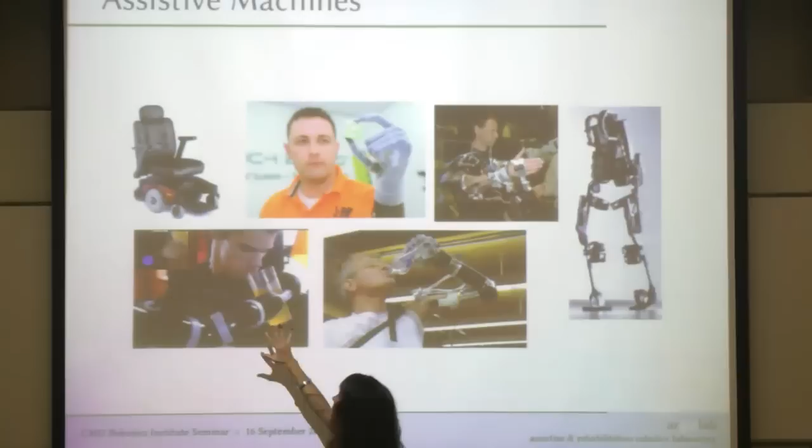If we now consider those more limited control interfaces that I was talking about that are used to drive powered wheelchairs, those just are not used to operate these kind of arms. It's too taxing to try to operate 6 dimensions individually. And so what we now see as a result of this is a paradox where the machines that likely would benefit a certain patient population the most are inaccessible to that patient population precisely because of their motor impairment.

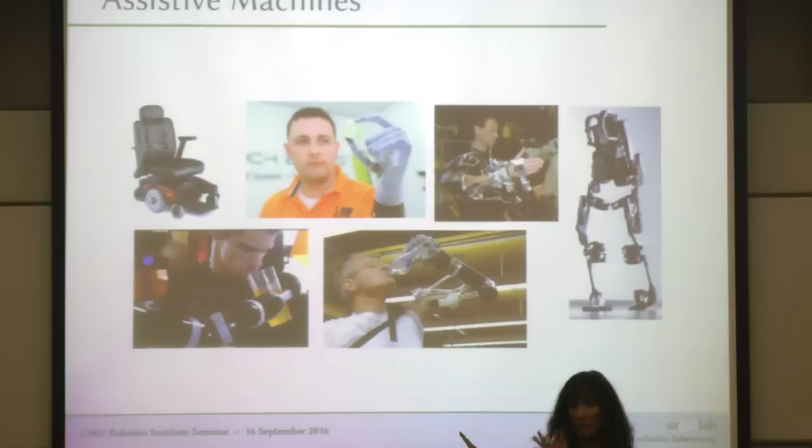And this is an opportunity for robotics autonomy. So if we can turn these assistive machines into autonomous robots that share control with the human user, so the human user is always still in the loop. We know that the humans want to be in the loop. They don't want a full autonomy solution.

But if we make these systems that can control themselves, and share control with the human, then we can hopefully offload some of the control burden from them, perhaps even make these assistive machines accessible to people whom they are not currently accessible to. So how do we turn an assistive machine into a robot? Oh, sorry. So just to recap, these control challenges that I mentioned on the previous slide.

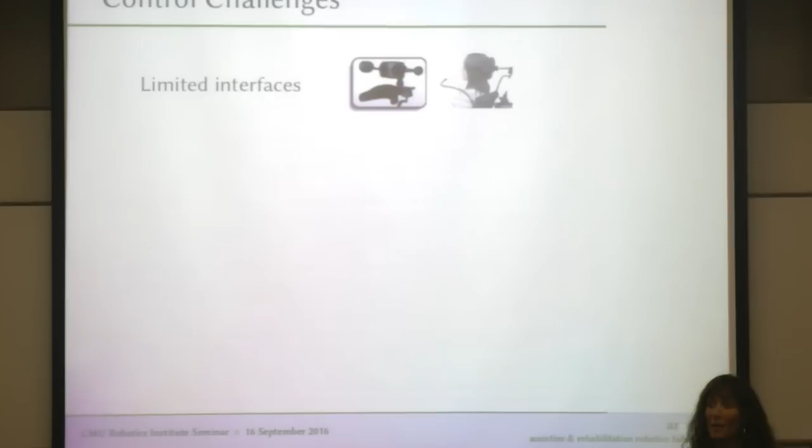So first, we have these limited interfaces that I mentioned. So right here is the sip and puff that I talked about. There's also head array-based interfaces, which are basically switches that are in the headrest. And so you tap back to go forward, you tap right and left to go left and right. If you need to go backwards, you maybe do a double tap back. You can sort of cheat if it's positioned properly and maybe activate the back and side panel at the same time, and then you could get a 2D control signal, but not necessarily always.

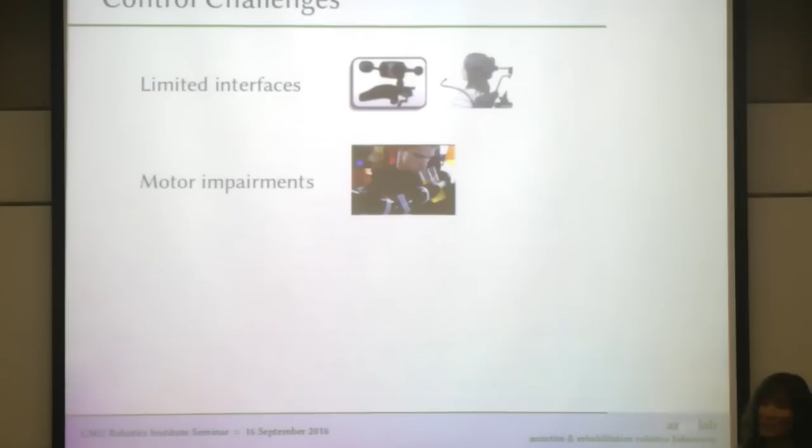Then we have the motor impairments of the user. So regardless of the interface that they're using, the motor impairments of the user are probably masking their true motor intent, perhaps filtering it as well. We have machine complexity. So we've got this paradox I mentioned earlier where likely the more motor impaired a person is, the more complex the assistance they require is, which means that the machine that will provide that assistance is more complex, which means it's more complex to control. And yet, it's harder for you to issue control signals of higher complexity because of your motor impairment.

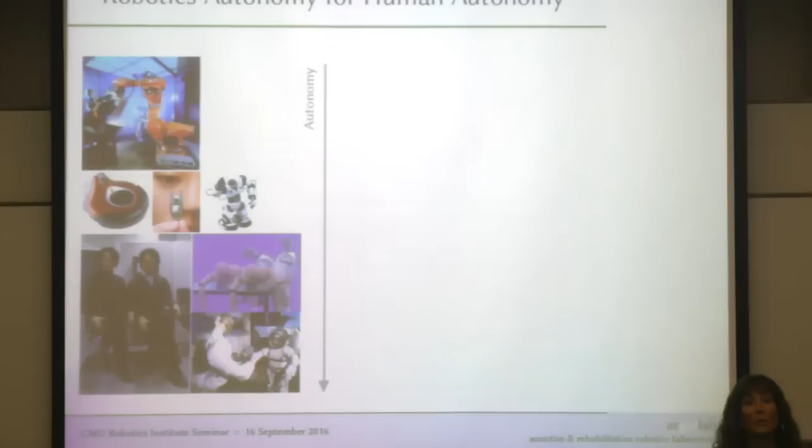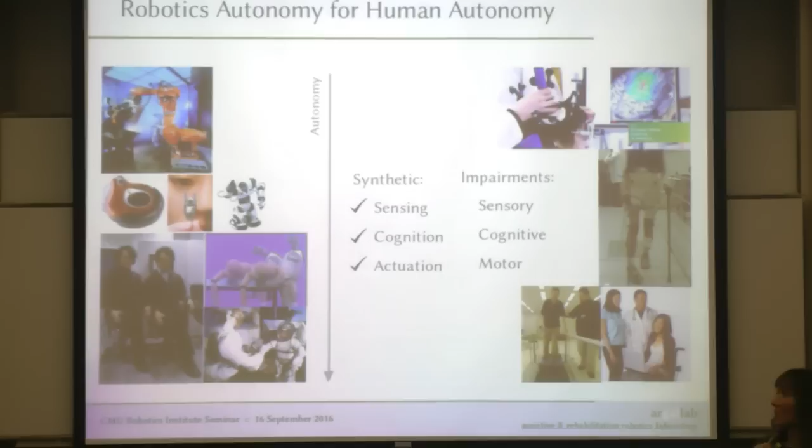So what we'd really like to do is leverage all these advances that we've made in robot autonomy as we've gone from robots in the factory to robots being in people's homes and future domains where we really want robots working side by side with humans. In order to do this, we've had to come up with synthetic ways to accomplish sensing, cognition, and also actuation. And what we would like to do is leverage these synthetic approaches to address impairments in the sensory, cognitive, and motor systems of humans.

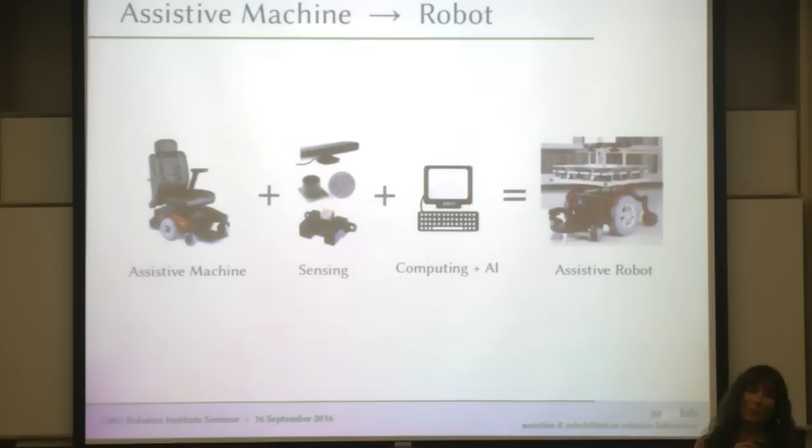All right, so how do we turn an assistive machine into a robot? It's going to be no big surprise to people in this room. We first need to add sensing in order to sense the external world. We have to add on computing and AI in order to reason about that sensory information and also the control signals that are coming from the human. And then we've turned our assistive machine into an assistive robot.

Now, all of these control challenges that I mentioned before that are challenges when the human is just trying to teleoperate the machine are also challenges for our autonomy to try to interface with the system. We also have one additional challenge as well, which is that our humans have non-static abilities. So we know that our humans are going to be changing over time, either because they are in successful rehabilitation and they're gaining function, which is of course what we hope. They might have a degenerative disease and they might be losing function, which is what we don't hope for, but it's the reality of the domain we work in.

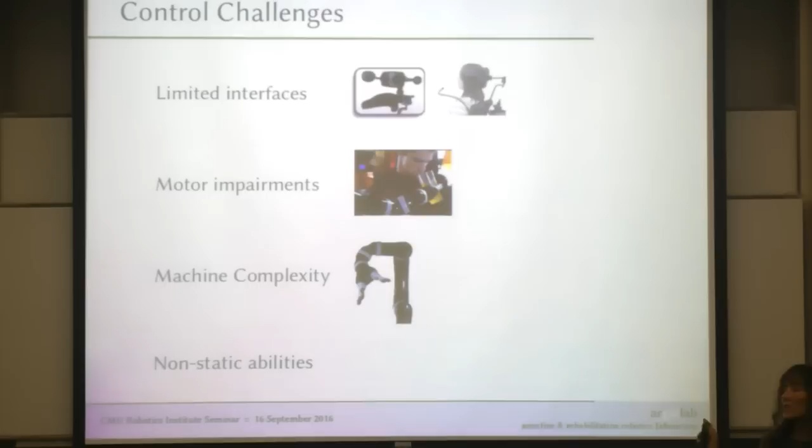They also are probably likely changing in the amount of assistance that they'd like day to day or even throughout a day based on things like fatigue or pain. And then also every human just changes over time in how they interact with automated systems in general. And so what we want to do is be actually responsive to that. I think actually that's going to be a linchpin in this kind of technology being adopted out in larger society, is being responsive to the fact that the amount of assistance that people want is going to be changing over time.

So these are the robot platforms that we're working on in my lab. We started out with this wheelchair platform that's actually just built on the base of a powered wheelchair. So this is a development platform. You'll notice that it doesn't have a seat. That came along last summer when we got a second platform, and my postdoc ported our sensory and software system onto it. And this is what we can now use to do subject studies with motor impaired patients who can't, for example, walk behind the robot while they're teleoperating it.

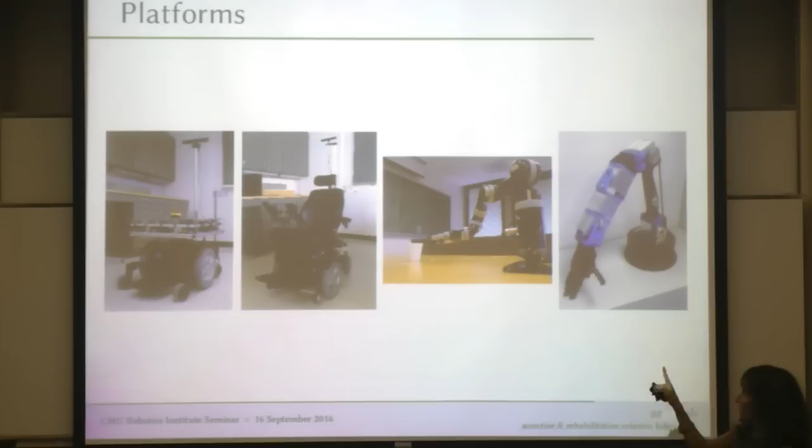Here we have the MICO robotic arm, which I mentioned earlier, which was developed specifically for assistive applications. And then this arm, which I'm not really going to talk about any further in the talk, but this is a neat arm that we've just only recently got. It's through a collaboration with Antonio Bicchi at the University of Pisa. So if anyone's ever seen the Pisa IIT hand, it's that hand on a sort of compliant arm base.

And so what's really neat about this hand is that you get all this extra hand functionality for just a one-dimensional control signal, because it has the first motor synergy of the human hand. So this is the first motor synergy of the human hand. It has that encoded and operated by one motor. And so basically, with the same complexity of operating this two-fingered gripper, we get way more hand function. So that's going to be really interesting to look at how that plays out in our lab, but we're still figuring out how to control it.

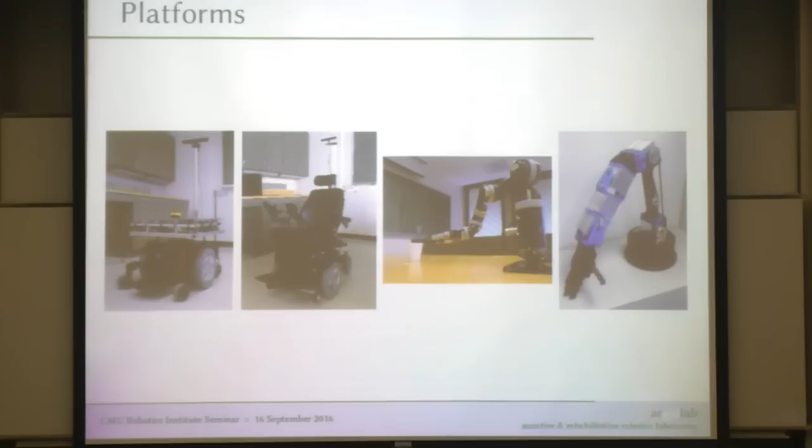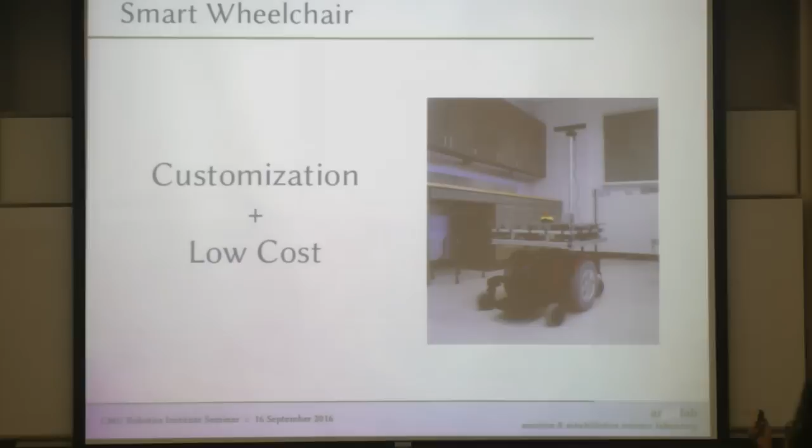All right, so I'm going to chat really briefly about the wheelchair platform we've been working on. So we have been prioritizing customization and low cost in the robotic wheelchair that we've been developing. So customization, I've already talked about why that's important. So each person is different in their individual abilities, in their preferences, and also actually in their bottom line financially. And we also expect that these are changing over time.

Low cost is necessary because we're not expecting that this is going to be covered by insurance every time or anytime soon. So when a patient gets fit for a powered wheelchair, a therapist will fill out a stack of forms this thick that justifies every cushion decision, every aspect of the control interface, everything, and that's the only way it'll get reimbursed by insurance. So the only way we're going to be reimbursed by insurance is if we make it into that packet. And that actually is my end goal: I will consider that we've made it with robotic wheelchair research when autonomy is a part of the options on insurance reimbursement forms.

But in order to do that, we're going to have a lot of studies that look at cost-benefit analysis and whether this amount of autonomy means that you are less dependent on caregivers by this amount and has this amount of cost savings, and that's going to take a lot of time. So we are prioritizing using commercial products, and this needs to be financeable out of pocket by at least a good portion of the population. So something like a laptop computer is reasonable to think of.

So in terms of customization, we're accomplishing customization using a modular software suite where we have different assistance modules that people can opt into or out of based on their needs or preferences. We also have ways to share control between the human and the robot, and those ways to share control are parameterized. And so these parameters provide tunable knobs that we can customize to each person. And in our future work, we're starting to look at adapting all of this over time, and I'll talk a little bit more about that at the end.

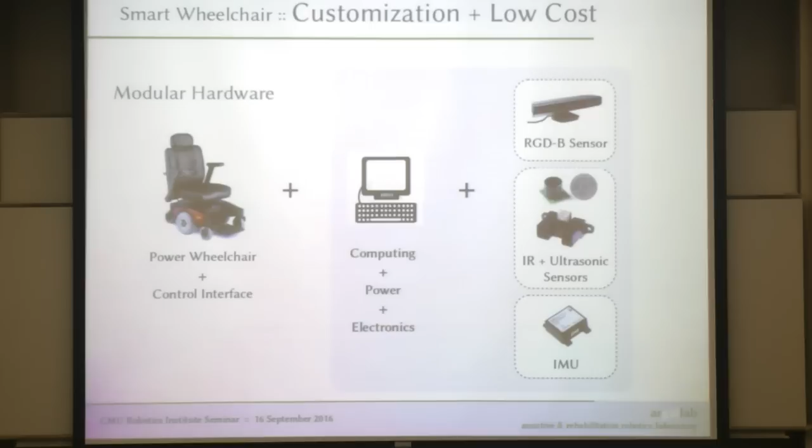And we've recently won an NIH SBIR that's a collaboration with a company. So hopefully we'll actually start seeing some of this technology come out of the lab soon.

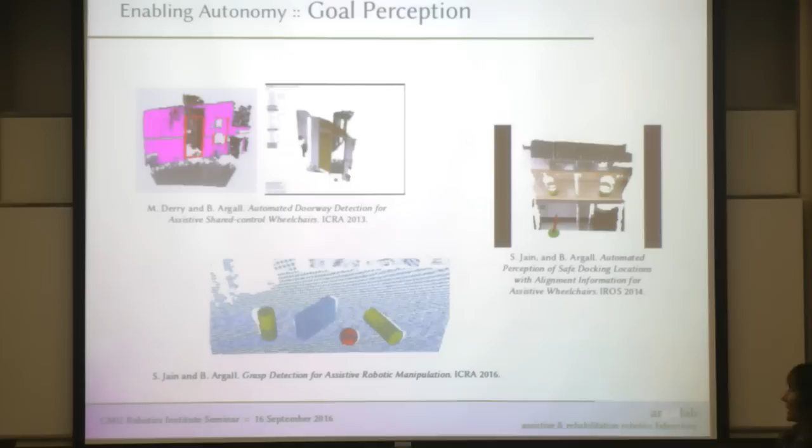Some of our work is about just enabling autonomy with goal perception. I wouldn't say this is a core research focus in my lab, but it's sort of just a necessary thing to get working. And we've done this for the wheelchair and as well for manipulation.

But really the big research questions in my lab are the following. So first is how to appropriately share control with the human. So I mentioned that this really needs to be customizable. We know we can't take away control from the human when they want to be in control. Then we're actually making them less able, which is entirely not the point. We can't give them control when they're not expecting it because it's dangerous. Exactly how to get this right is a huge open question, and there's a lot of research that needs to be done in this area.

And then the second is how to adapt this over time. So the control sharing, or maybe just the control itself, the autonomy itself. How do we adapt this over time? How do we adapt this to different people? So I'm first going to talk about control sharing. Most of my talk's actually going to be about control sharing because that's where most of our work has happened so far. So one of the really basic ways that we do control sharing is just for safety.

So if you watch my thumb here, you'll see that I'm always trying to drive the wheelchair forward into the chair. And what's happening is that we are just sort of forward projecting my command and creating a sort of temporary sub-goal. So we aren't trying to infer anything higher level than that about what the human's trying to do. This is just a very basic low-level functionality.

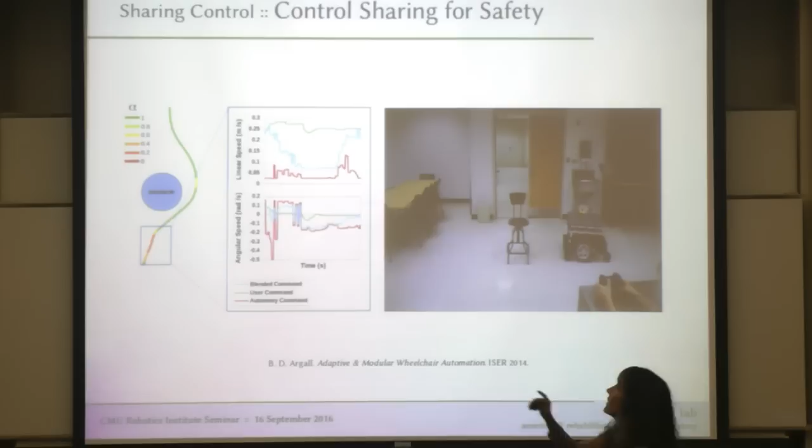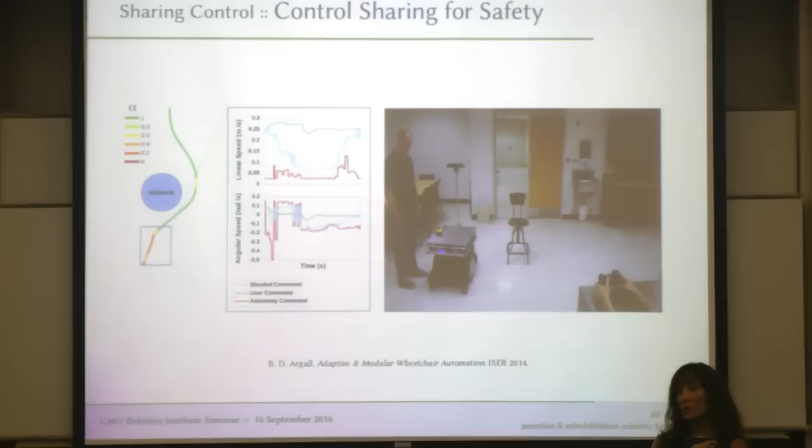What happens is if that goal ends up in an obstacle, we sort of iteratively shift control away from the human. So this alpha factor is dictating how much control lies with the human, where full teleoperation is in green, and how much lies with the autonomy, where full autonomy is red. And so it's really just if a collision is really imminent that we take control away fully. Otherwise, we do it iteratively, just to try to not wrench control from the human.

One thing that we're in the middle of doing right now is a comparative study between different ways to share control. And this is something that we really don't see much of in the literature, but we think is probably pretty important to start investigating. So oftentimes what we see in the literature is a comparison between full autonomy and shared control, or full teleoperation, no autonomy, and shared control, which are also important comparisons to make. But this question of whether the way we shared control is the right way or the preferred way to do it, we often don't see a lot of comparison of that. So that's something that we're in the middle of doing right now.

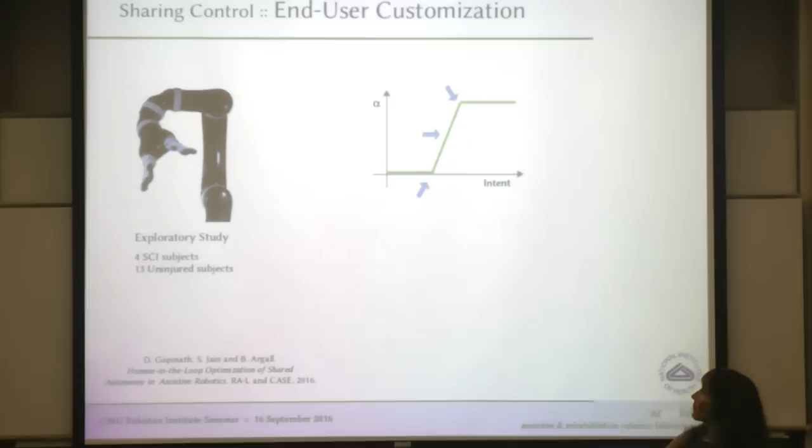And so now this is a function that is parameterized by 3 parameters. So one is at what point does assistance kick in? What point does the robot start helping? The slope of this function defines how quickly the robot ramps up the help it's providing. And then how high that bar ends in the end is telling us that once we're really confident, does any control lie with the human at all? Or how much control lies with the human? So you can imagine we get different functions with different parameterizations.

What we did in this study, it was an exploratory study, and we let people verbally modulate these functions. So they were just telling us, I wanted the robot to take control earlier, I wanted it to take control faster, and we would tweak these parameters just to kind of see what sort of functions they were coming at. There was a sort of minimum assistance level and a maximum assistance level that we tested as a comparison, and then this customized function lied somewhere in between. And we did 2 rounds of customization for 2 different tasks.

So on the top here, we see what this looks like with teleoperation. So he's teleoperating, I believe, in the 3-axis control mode. What you see right now is that he is performing a mode switch. He doesn't have the hand function or the finger function to be able to push on the button to perform the mode switch. So he is wearing what's called a utility cuff, and there's a pen inside of it, and he's using that to perform the mode switch.

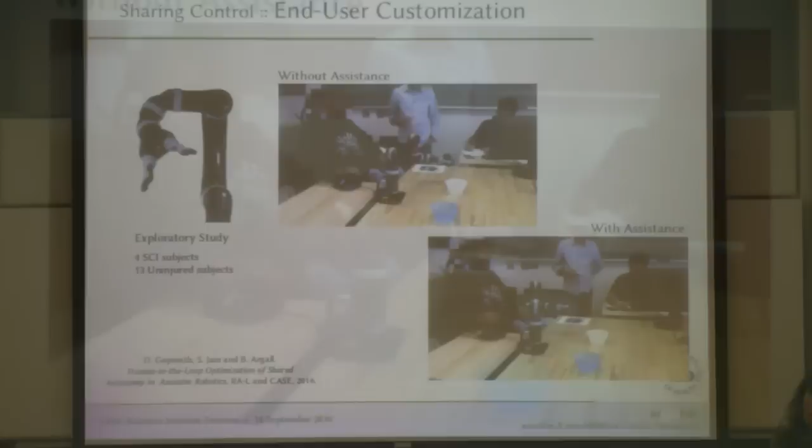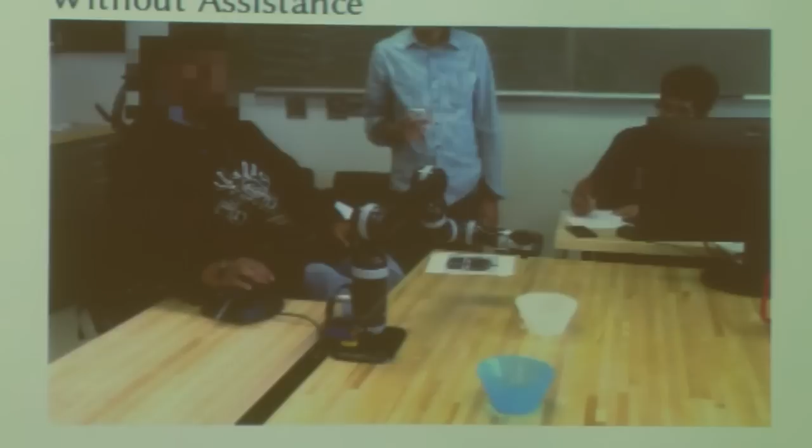So you'll see he does the mode switch, and then as he starts teleoperating again, it ends up that actually he's not in the mode that he thought he was. So he has to perform a second mode switch. And this often happens, that it's hard to remember which mode you're in. The Kinova joystick actually provides some visual feedback on this, which we did not have in this study. So that's what it looks like under full teleoperation. You can see that there's multiple mode switches that need to happen.

Here we have him using an arbitration function that he customized himself. So now that the autonomy is helping, one thing you notice is that you don't need to have any mode switches. Now this is partly lucky. It partly depends on the mode that you started out in and whether or not that mode was one in which you could disambiguate the goals, right? So if I'd started out in a rotation mode, I maybe wouldn't get any information about which goal I was going towards. But he happened to start out in a mode that was informative for disambiguating these goals.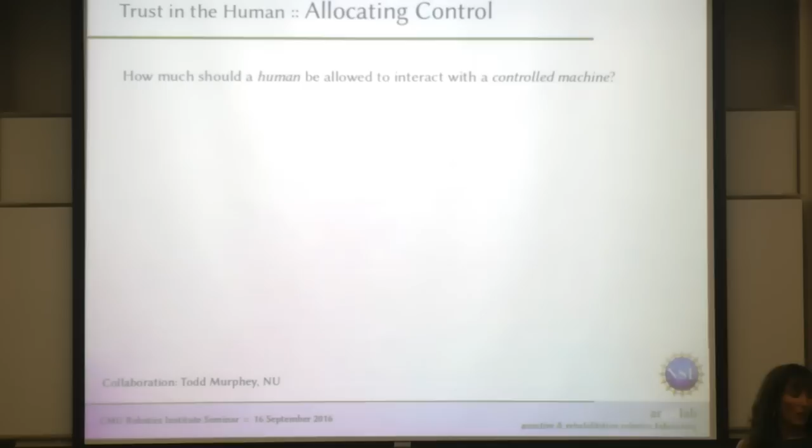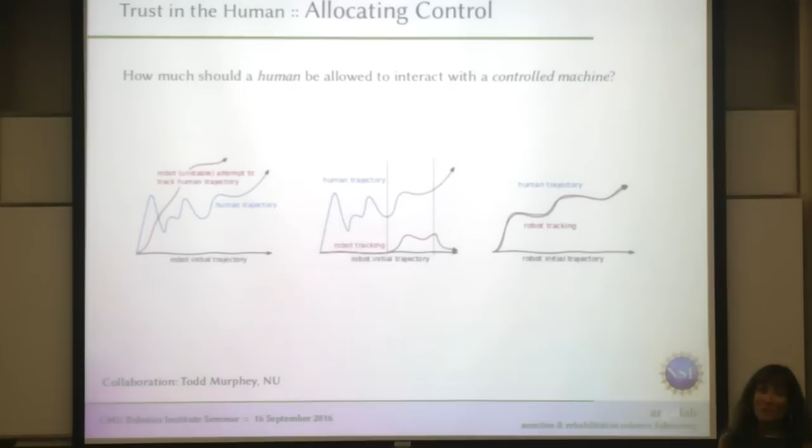And we're looking at this in 2 different studies. So one is a collaboration I've had with Todd Murphey at Northwestern for a couple of years now. And we started out by asking the question of how much should a human be allowed to interact with a controlled machine. So you could imagine here, these are just mock-ups, but if we had a robot that was able to stabilize to a certain trajectory, now the human demonstrates something else, and it's not something that the robot can stabilize to. Perhaps it should only just take an iterative step in the direction of that trajectory, for example, unless it really trusts the human to teach it something new. And then you would maybe take a larger iterative step.

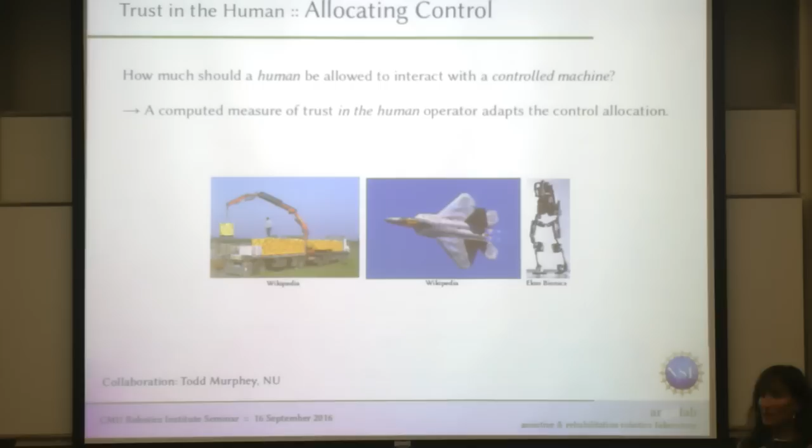So we've been doing work where we have a computed measure of trust in the human, and we're using this to adapt the allocation of control between the human and the robot system. We're thinking about this in the context specifically of very highly dynamic systems. So a good example are fighter jets, that these actually can't be controlled just by humans. The dynamics of the system can't be operated by a human as full teleoperation. They need some autonomy stabilizing the system. Oftentimes, when that's the case, if the human is able to disturb the dynamics at all, lots of times the dynamics are just dumbed down.

So in like this crane example, it would be that you just move the payload very slowly instead of taking advantage of the fact that there are dynamics that you can, for example, swing it up into place or something. You can leverage the dynamics, but that's often not exploited. Similarly with exoskeletons. So this is now a shared control system where the human is perhaps providing an indication of what kind of gait cycle you should be in, but the stability of that gait cycle is managed by the automated system.

So we did a study in simulation. I'm not going to get into this hardware platform. It exists in Todd's lab, but basically there is a real hardware platform that this is mimicking; you can think of it as being similar to a crane with a payload. We had 22 participants, and we had 2 trust paradigms, where for both of them, we started out by estimating the trust at the beginning that we should have in the human operator.

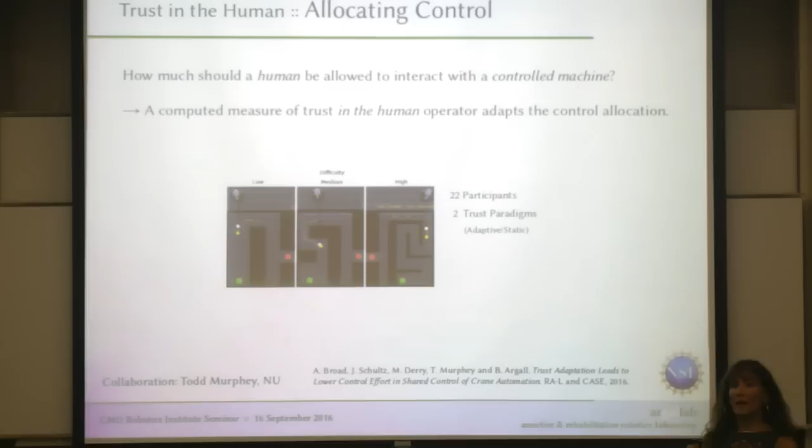And then in one group, we just kept this static for the entire time. And then in the second group, this became adaptive, where we were constantly adapting it after each trial based on the performance of the human.

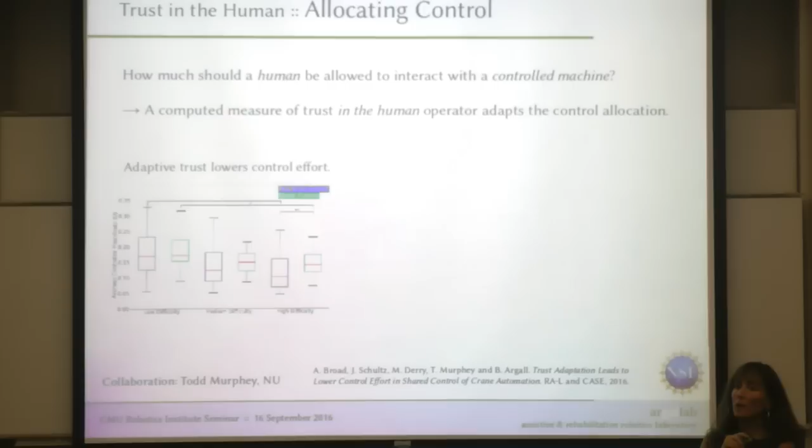And two interesting things came out of this study. One, that adaptive trust lowers controller effort. So basically, when the trust was adaptive, the human generated trajectories that were easier for the controlled system to track, which we could interpret as the human having a better understanding of what the system was trying to do.

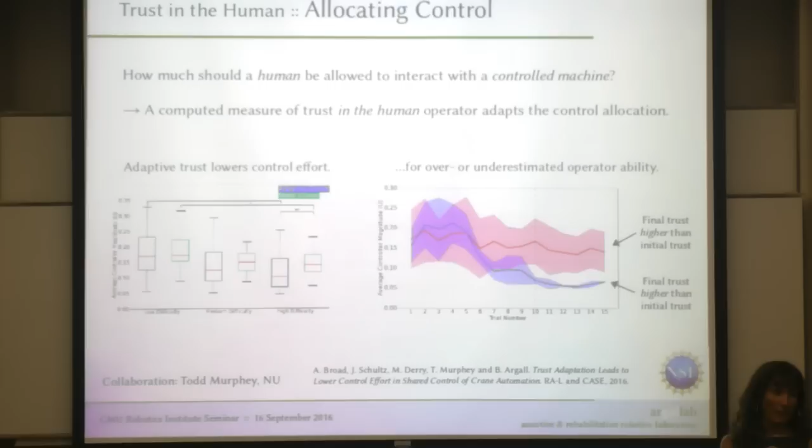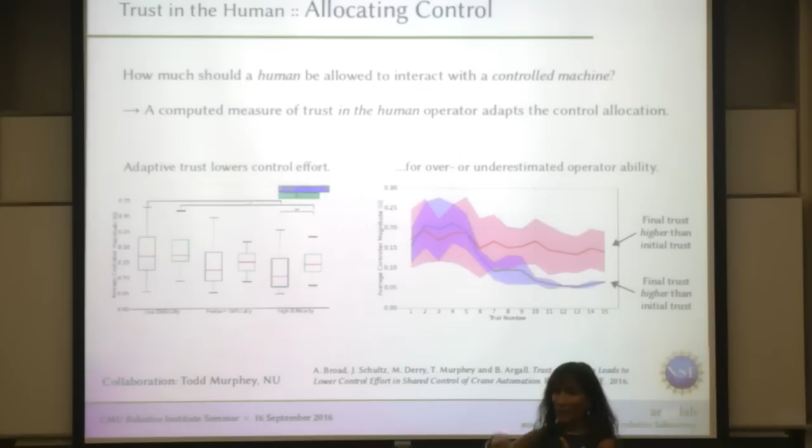What's also interesting is that this happened regardless of whether or not our initial estimate of the value of trust was an overestimate or an underestimate. So for some people, the final value that they ended up in was higher trust than they started out at. In some cases, it was lower trust. But in all cases, adapting that trust, whether it was to higher or to lower, actually lowered the controller effort, which is an interesting thing to have come out of this.

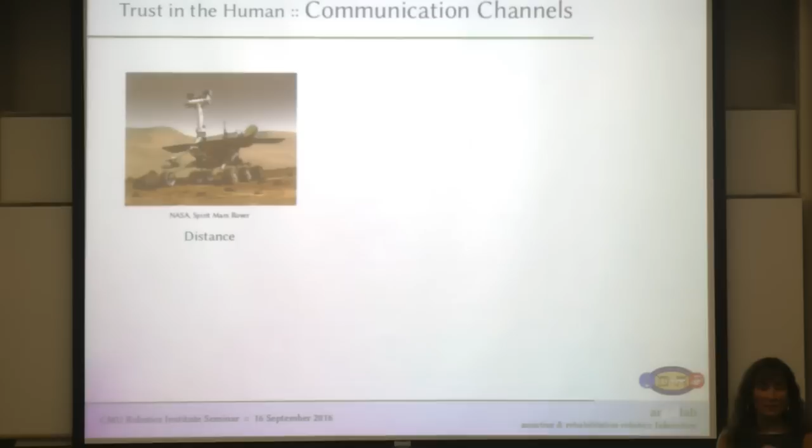Okay, another project that we're just getting started under a new grant from the ONR is thinking about communication channels between humans and robots, and whether or not we can trust the quality of communication channels. We're used to thinking about communication channels in terms of distance, being challenged by distance. We're used to thinking about them happening in difficult or adversarial environments, that they are challenged there.

One of the arguments I'd say we're making in this project is that a lot of these challenges are similar to what we see when people with motor impairments are trying to operate assistive machines with limited interfaces. That these are perhaps noisy communication channels, that they are limited in some way and constrained in some way.

And so what we're doing in this project is we are coming up with ways to compute measures of trust in the quality of information coming from the human, including the quality of information along the communication channel. And we're going to use this to decide whether or not control needs to be allocated more to the autonomy or more to the human. And also we're going to use it to temper learning.

And so that's another thing I forgot to mention on the earlier slide, that I think thinking about trust in the human is also really important within the context of humans teaching robots, whether or not that's a good teacher or a trustworthy teacher. And so this system's also going to be learning and adapting over time in response to signals from the human, and that's all going to be tempered by this computed measure of trust.

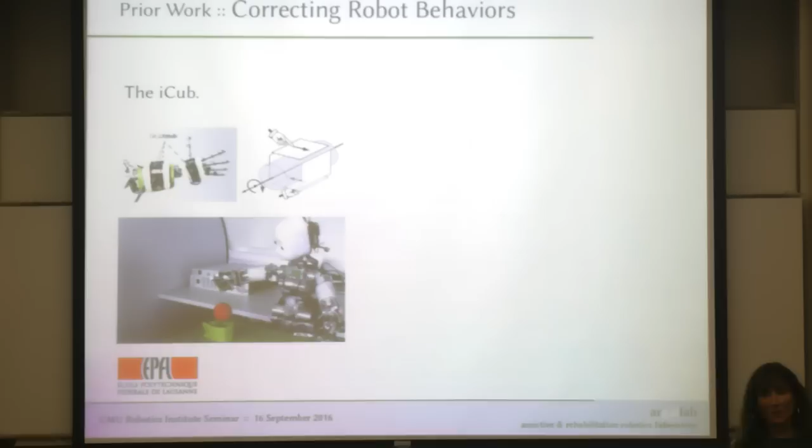Okay, so far I've been talking about shared control largely. So now I'm going to shift to talking about how to adapt this control. So I'm going to take a step back and talk a little bit about my work before I came to RIC and Northwestern. I mentioned that that's when I entered the world of rehab. And before that, I was doing a postdoc at EPFL working with the iCub, and I was doing my PhD here working with the Segway.

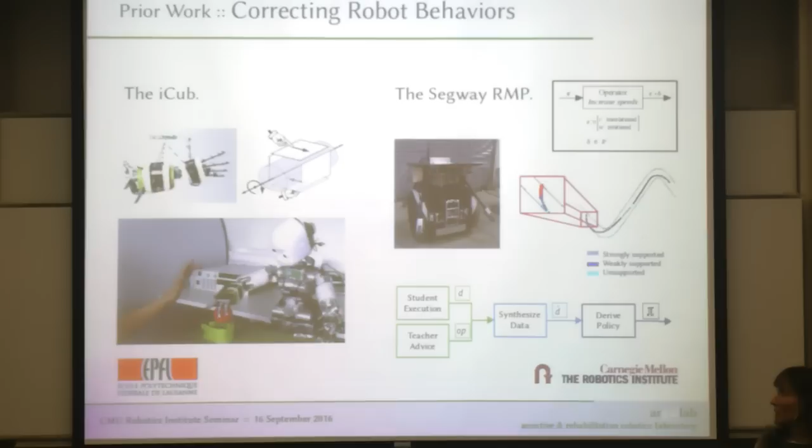And in both cases, at a high level, what I was doing was figuring out ways to correct robots' motion after it had been demonstrated. So on the left, we had a tactile interface that we were using to move the position of the robot. This wasn't a back-drivable robot, so we couldn't correct it in that way. And so it was responsive to our touch, and that's how we provided position corrections.

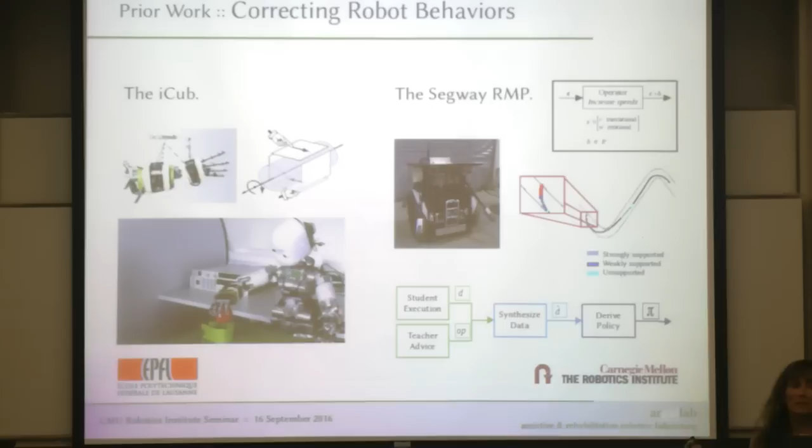In my PhD, we had developed this language, or this formulation that we called advice operators, where basically you could take a chunk of an execution and then also select an advice operator, which was actually a mathematical formula, and it would spit out a whole bunch of new demonstration points that have been modified, that were basically the executed points modified by this function, and use that to rebuild your policy.

And we used these corrections in a bunch of different ways. So first, the first logical step was to use it for policy refinement. So if you had demonstrated something and then you wanted to improve the behavior of what you had demonstrated, you provide corrections in that case. We also used it for policy reuse, so to kind of bootstrap.

If we wanted to start out with a policy that we already knew how to do, and we didn't want to start demonstration from scratch, but we wanted to just provide a correction, but have it have more immediate impact than it would if we were only just trying to do refinement.

And then we also used it for policy scaffolding, where we would demonstrate motion primitives, but the system had no idea about how to sort of manage transitions between these primitives. And just on the fly, as it was executing, we provided corrections to help out with that.

And so a lot of these ideas are now starting to come full circle back into the research in my lab in rehabilitation and assistive robotics. And that's because we're interested in this question of adapting control. We want to change the control over time. We want to do it in response to the humans.

But they're communicating with us over these lousy communication channels, right? These lousy interfaces. And so what this essentially amounts to is robot learning for motor impaired teachers. And this is something we're really excited to get working on. I don't really know of any other work in the field that's looking at this. And I think it's a really big question about what machine learning looks like when these are the teachers that you have providing data. So one big question is how to adapt.

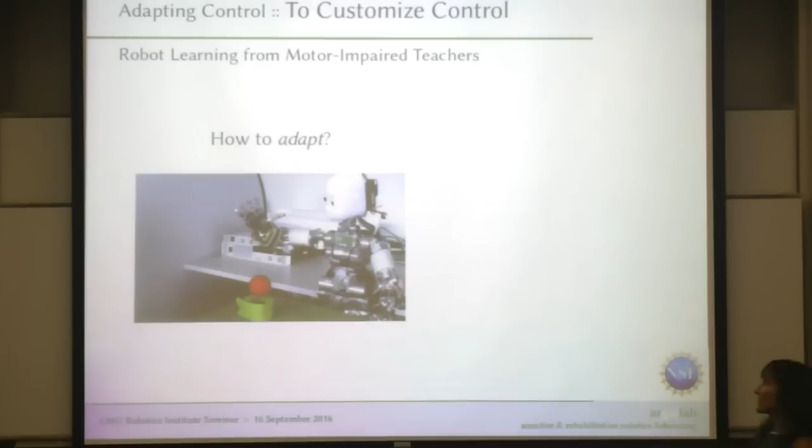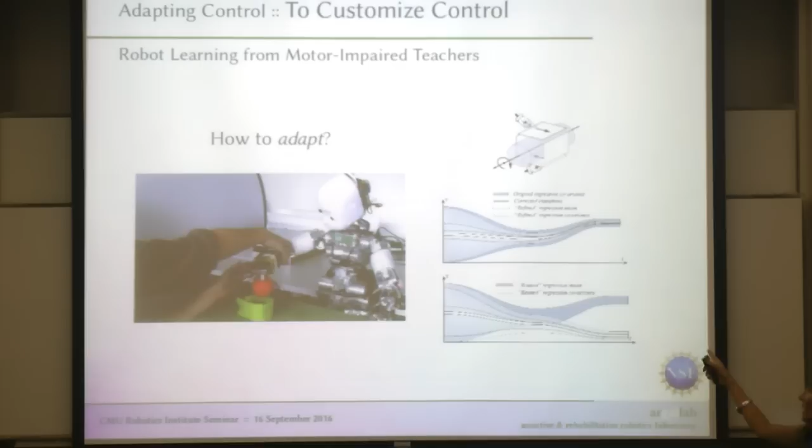So with the iCub, we had this tactile interface where someone could sort of touch the interface, and we used that in order to change our regression model. And that sort of interface for how the human communicates information to the robot certainly would not necessarily be appropriate in a domain where people struggle to move.

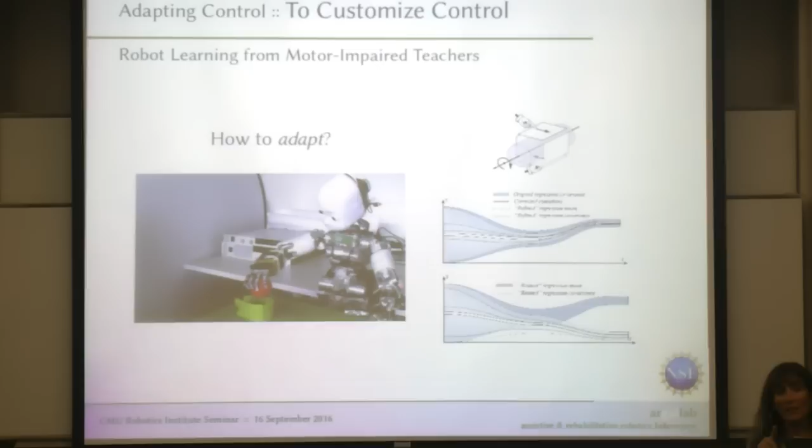And so what actually are the interfaces that we're going to be able to use, and what the feedback signal looks like when it's coming along those interfaces, those communication channels, I think is going to be a real big question to answer. And then also we expect that people are going to want to be able to define new robot behaviors. So especially for manipulation, I think it's very, very reasonable that people are going to have an idea of what they'd like the robot to do.

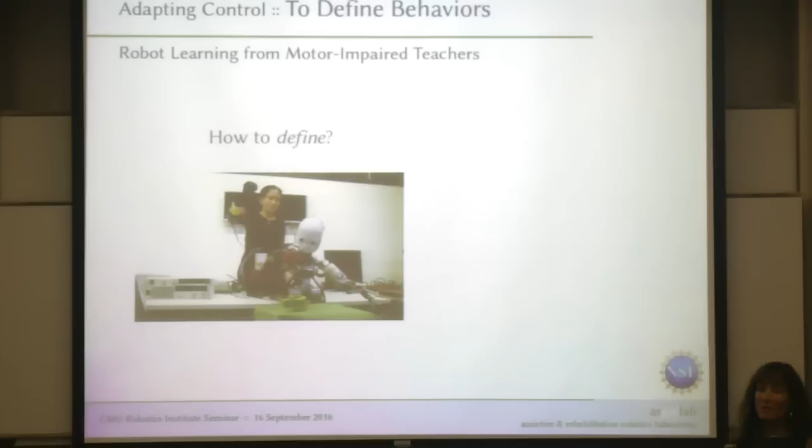So demonstration learning is a very natural way for people who are not experts to be able to provide demonstrations. The thing is that even if people are not robotics experts, we normally sort of assume some level of task expertise. And that's something that we might not even be able to assume in this domain. So coming up with machine learning techniques that can handle that, perhaps even exploit that, is going to be a big focus of this project. And so again, if we have these limited interfaces and the motor impairments, what does demonstration look like in that kind of a domain?

One final project that we're working on for adapting control is a collaboration with Sandro Mussa-Ivaldi, who's also at Northwestern and RIC. Sandro's group has developed something that they call the body-machine interface, which is basically a vest of IMUs, and it's worn, and it kind of turns the body into a joystick. And so what it can do is detect very subtle movements in the shoulder. So it's actually able to be operated by people with very high spinal cord injury who are quadriplegics.

And lots of times, if it's an incomplete injury, you still have a little bit of residual movement in your shoulders. It can pick up those very subtle movements. It's a vest of IMUs. They project it down to a lower dimensional, like a 2D space, and they've used this to control the position of a cursor on a screen. They've used it to do typing on a virtual keyboard. They've used it to drive a powered wheelchair, all 2D control problems. What we would like to do is have it control a robotic arm, which is a 6D control problem.

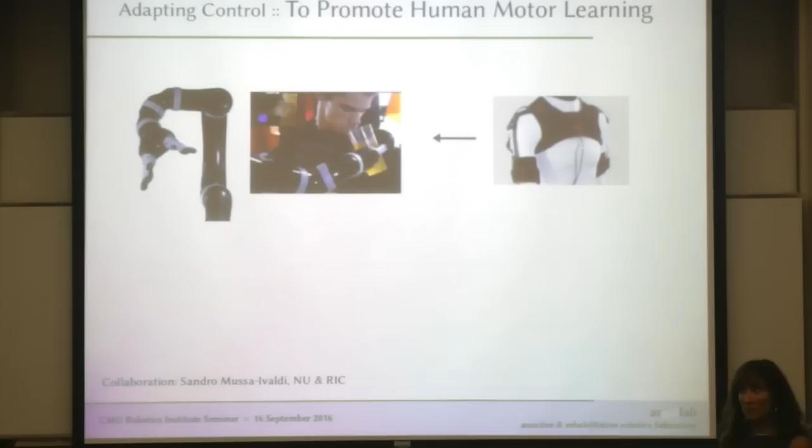Now, we don't even know actually if this is even feasible. I know that I can certainly think of like 4 distinct axes that I would use to control with my shoulders, and I'm a person who has no motor impairments. What it would look like to introduce a 5th and 6th axis, and how intuitive that would be, I'm not sure. So we're not even sure if this is going to be possible, but the way that we're going to try to make it happen is by leveraging robot autonomy to help with the human motor learning.

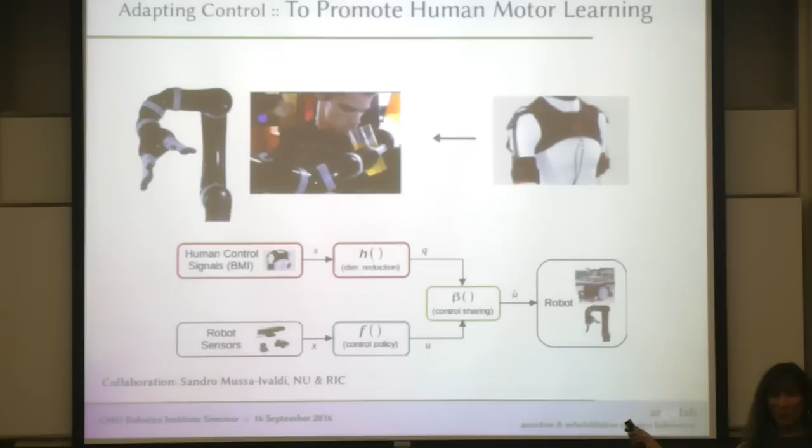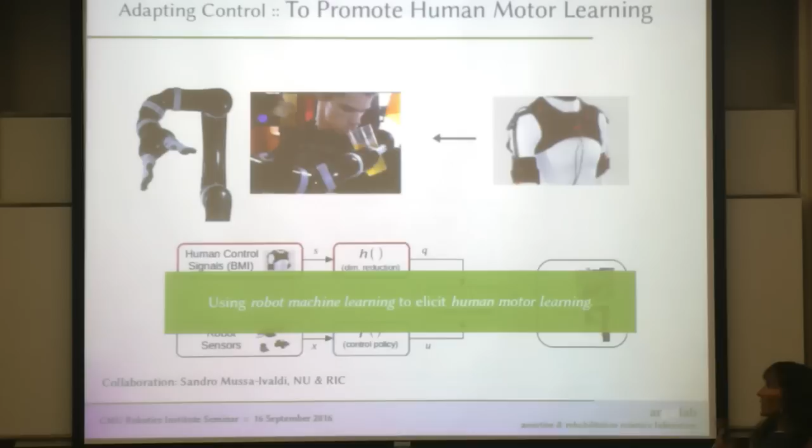So what we would do is have the robot autonomy step in, fill in the rest of the control signal. When the human robot team is sufficiently able, then we step back a control dimension and pass that back off to the human. And we do this in an iterative way over time, and hopefully that makes it so that the human is able to take over more and more of the dimensions of control. What we like about this approach is that we're actually using robot machine learning in order to elicit human motor learning, which I think will be really neat to see if it works.

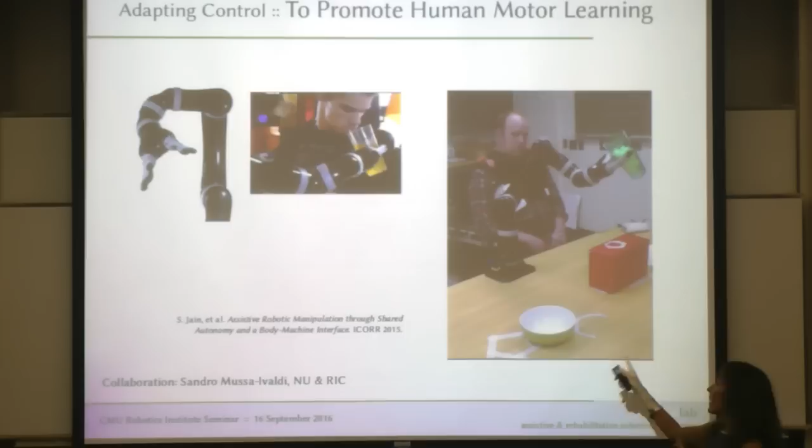We've demonstrated the integration of these two technologies. So here the body-machine interface was still just providing a 2D control signal. The control signal is being used to control the speed of the execution and also the transition between piecewise trajectories. So we defined piecewise trajectories for this task, and the person needed to decide when to transition between them. And then just as a little pilot experiment, we modulated the position of the bowl so that people had to time the execution or the transition at the right time in order to get it in.

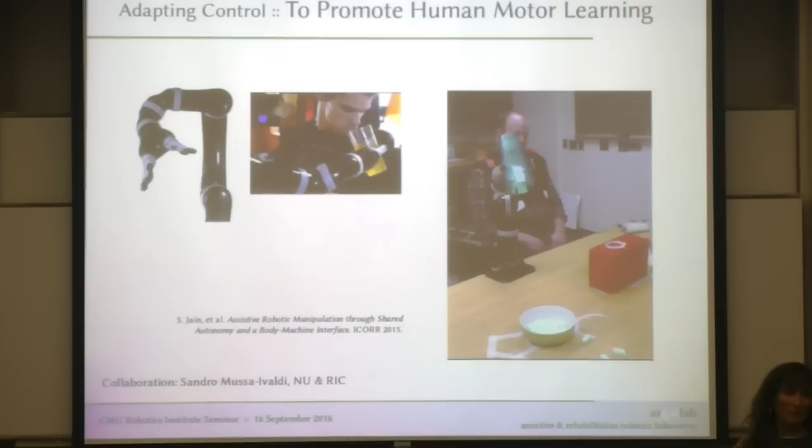So you'll notice that his shoulder movements are really large. That's because he has no motor impairments. And so it's actually encouraging you to use the full space of your motor ability, which is another really nice thing about this body-machine interface, is that you have to move to use it. So in comparison with a brain-computer interface, it actually is promoting motor rehabilitation by operating the assistive machine, which also we think has some potentially really interesting benefits. Sandro's group is actually already performing a clinical trial to see how much benefit you can have by using this machine, but he hasn't used it with robotic arms yet.

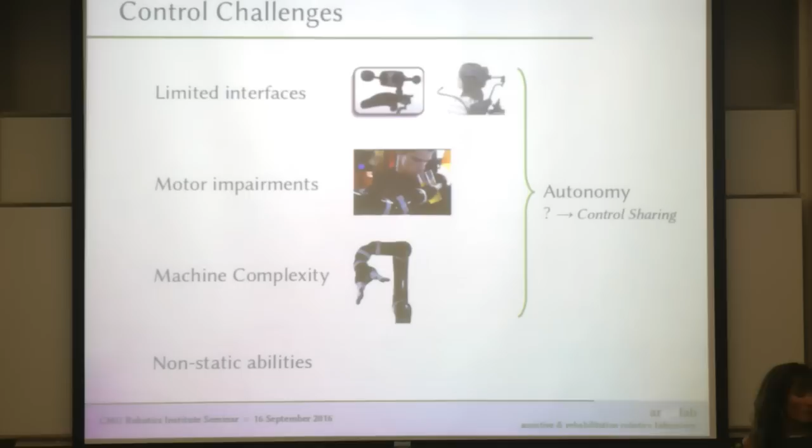Okay, so just to return to my earlier slide, I mentioned that we have these control challenges in this domain of physically assistive machines that are meant to be operated by humans, that we are addressing these first 3 limitations or challenges by introducing autonomy. And the big question when we introduce autonomy is how do we actually accomplish the control sharing? Then we also have this challenge of non-static abilities, and in this case we're going to be performing adaptation, but this question of where the learning signal is coming from and what they look like is also a big unknown that we're going to be researching in the coming years.